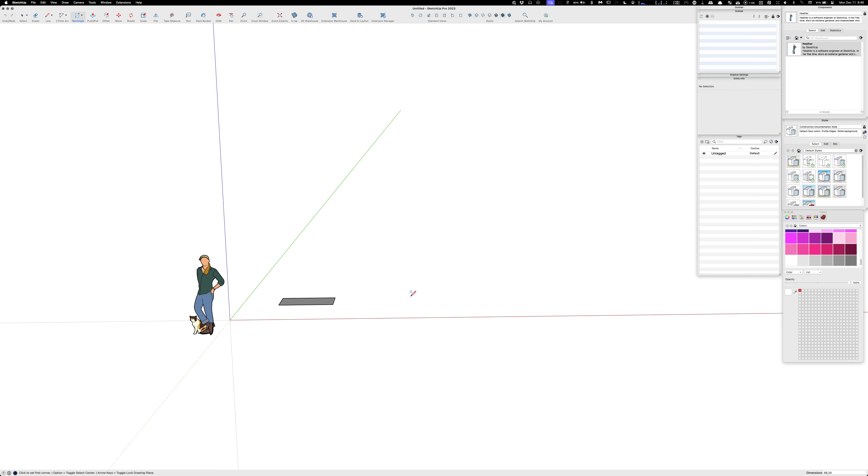I'm way over here. And then when I look over to the right, I've got a 9-foot length and a 2-foot length. So now I know 9 foot is left to right. So, but say I want it to go the other way. So then I'll go 48 by 24. And that way I now know that I've got 48 by 24.

But what happens if I did this? What if I wanted to go the other direction? So there it is again. We're like 9 foot and 2 foot. Well, I'm going to go 24 by 48. And let's spin around and look at these. These are the same. They're the exact same rectangles except in two different directions.

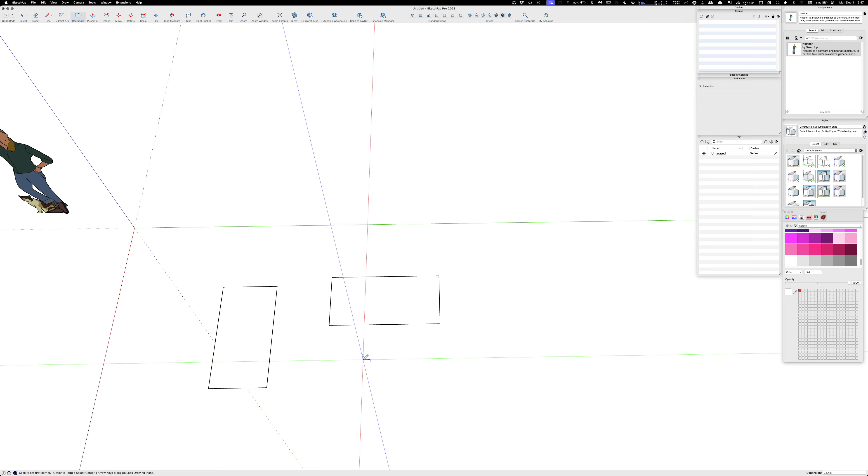So that's how to use the rectangle tool correctly, is make it extreme. Always start like this. And when you see the really long number is the first number, then you can go, well, I don't want it to go that direction. So you make the first number the shorter number of whatever set of dimensions you're going to be working with. So I'll escape out of that.

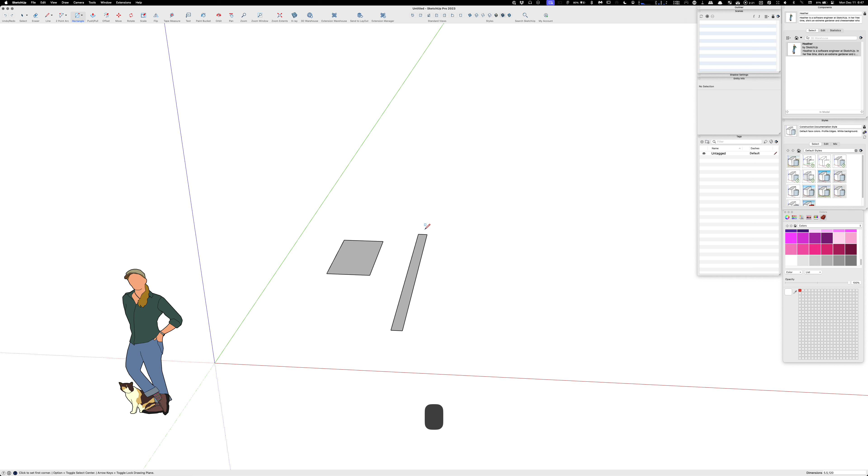The other thing is with Flip. So I'm going to really quickly see this here. I'm going this direction, and it's 3 1/8 by 10 feet. So let's go 5.5, comma 120. So there's like a 2x6, a 10-foot 2x6. It's a little shorter because they always give you a little bit on the end, so you can cut it.

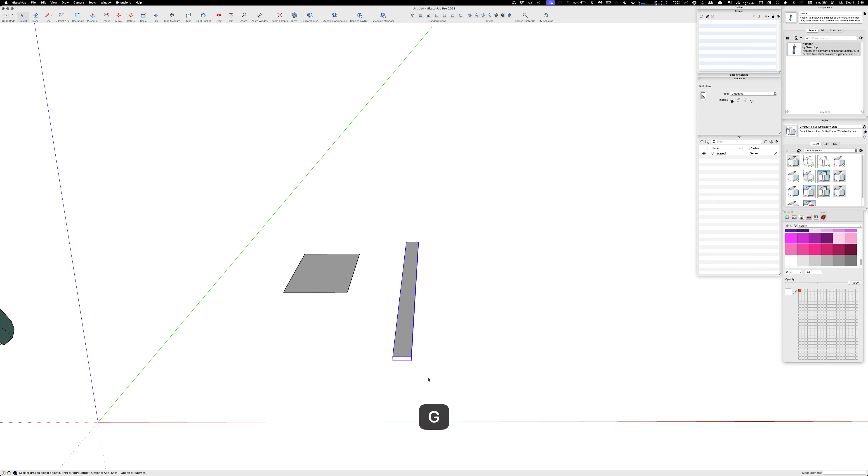And then you immediately go push-pull, which is the letter P. Come up 1.5. Here's your third tip. The sizes of things in North America, what we call it is not what it is. It's always chaos out here. They machine surface all four sides.

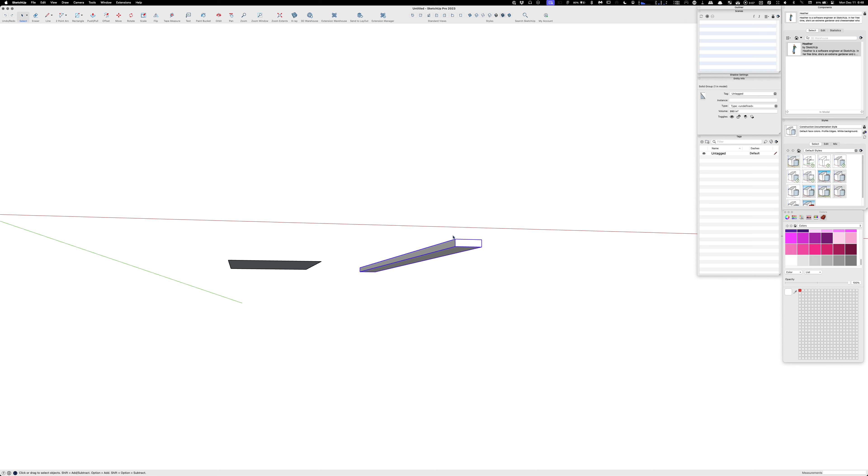So it is a 2x6 before it becomes surfaced. And then it's like planed on all four sides so that they become universally smooth. And that takes off like a 1/4 inch on each side. So starting off 2 inches tall and 6 inches wide, the finished product that you see at your big box store is 5.5 wide by 1.5 tall. So here's our plate.

You know what? Excuse me, ma'am. You need to be out of the way.

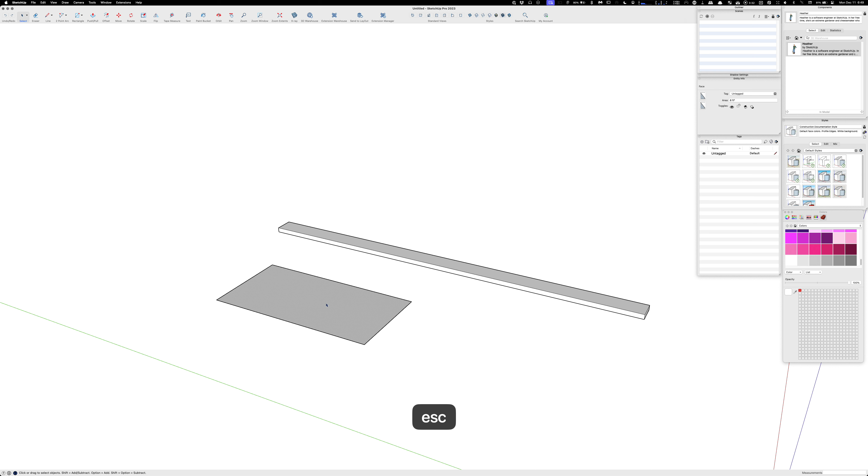And this is that rectangle that I drew, and I haven't done anything to it. I haven't grouped it. It's just sticky geometry, right? So I'm going to double, triple, whatever, quadruple click so that I get all the lines and all the face, and I'm going to G that. And we're going to put some blocking on here, but I want to use the flip command.

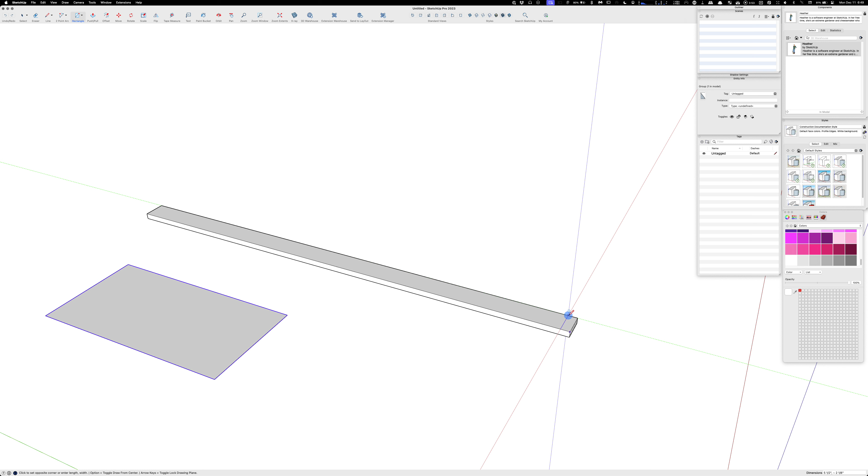So I'm going to go like this. Come on, baby. So see how it's not catching on the face? So I can push the up arrow, and then it locks it in the vertical plane, the Z plane. And now, no matter what I do, I've got it locked. And I can hover over near the edge. It says 5.5 and then tilde something. So that means it's almost 2 inches.

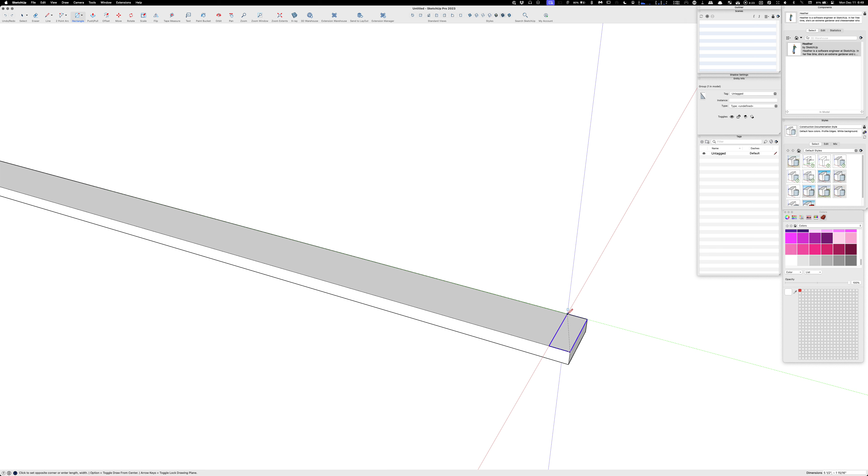So what you can do is that first 5.5 is what you want. So you just ignore that and then type comma 1.5, enter. And now the push pull, let's put a little block. Well, that's far enough. And then always 1, 2, 3, group. Or if I did component, the only advantage is if I needed to make these all taller, I'd edit one component and they would all adjust the same as the edit of the first component that I did.

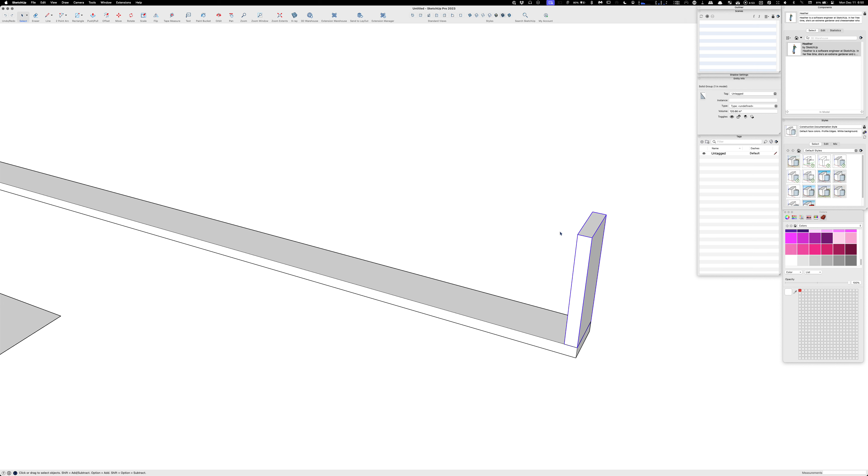While you're drawing, a good habit to get into is, okay, what are we calling these? And start building your library. Like this is a plate. So I would go like this. It's the very bottom thing. So the way I like to do it is start a numbering chain of this and then just go 2x6 plate.

And while it's there, come up here to this little flag thing, click on it. And now when you click on it right here in your group setting, it's been tagged or it's on a layer, however you want to think of it. And we'll call this a stud, so we need to create that.

So I'm going to go 005, and I like to skip numbers like 001, then 005, then 010, because it's always something where I'll be building a scene and I want it in a certain order, and I'll be able to change that number to something before or after, and I'll have space to be able to do it so I can maintain everything in a numerical alphabetical order, if that makes sense. So we're going to call this 2x6 stud.

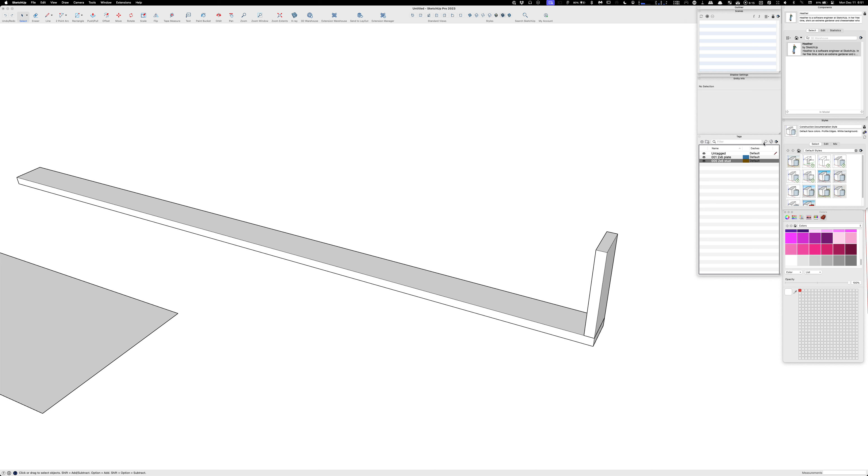Enter. Come up to the little tag, price tag thing. Click OK. And I'm hitting spacebar to bring me back to having the non-engaged tool. So the way we can do it like this, we can go up here and hit flip.

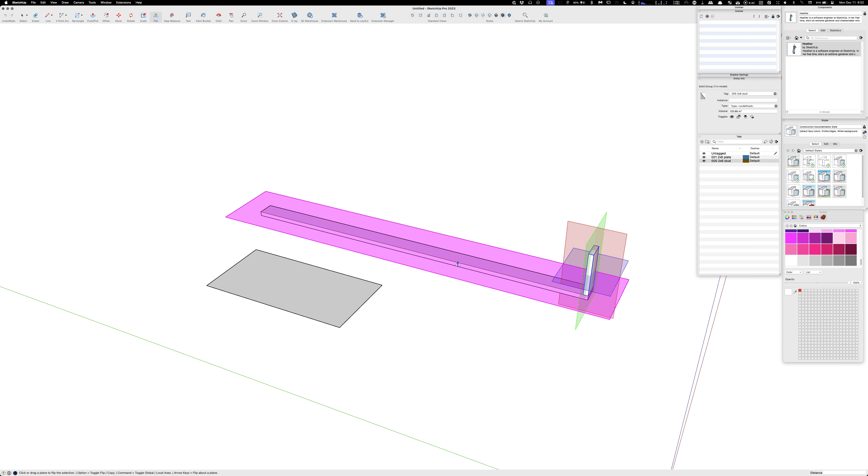And I just learned this just the other day. So I want to flip this to the other end of this board. But as you drag your cursor, there's no plane to flip. But what they showed was you could take this and left click and hold and drag along, drag along till all of a sudden there. See that? It snapped to the middle and it moved it.

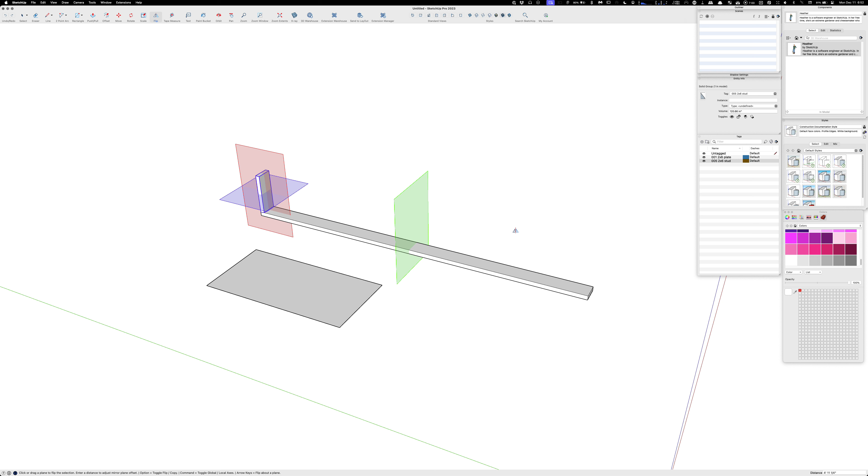But what I didn't want was I didn't want to move it. Hey, look at that. So it moved it, but I haven't released the tool yet. And I just went down and pressed Option, and it put the original one back. And now the one that's on the left is the copy. So that's the trick with all these tools. Flip has a copy option, or Alt if you're on a Windows machine.

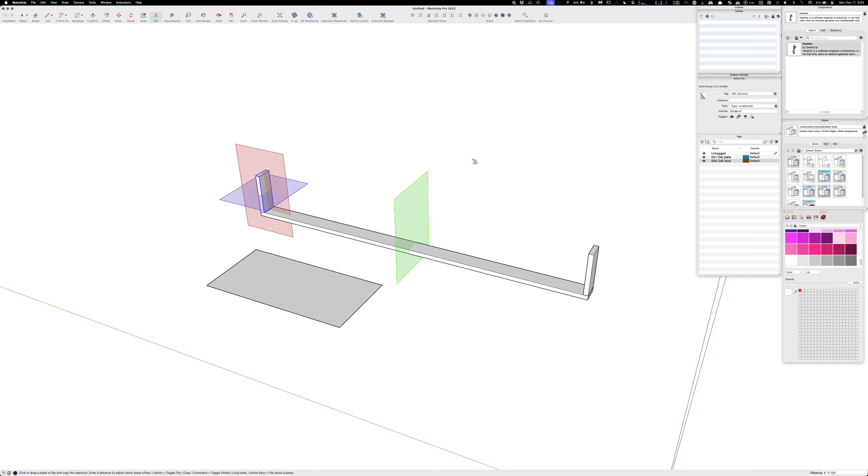Rotate has a copy option, which is kind of nice because you can have a plate at one point and then rotate a whole new plate from the original. But if you saw there what happened, I had to drag that plane until I got it where I wanted it, right? And now I'm going to hit Enter, or spacebar. I'm not really sure, but that's what we got. We got those two. But what I found, which is a lot faster.

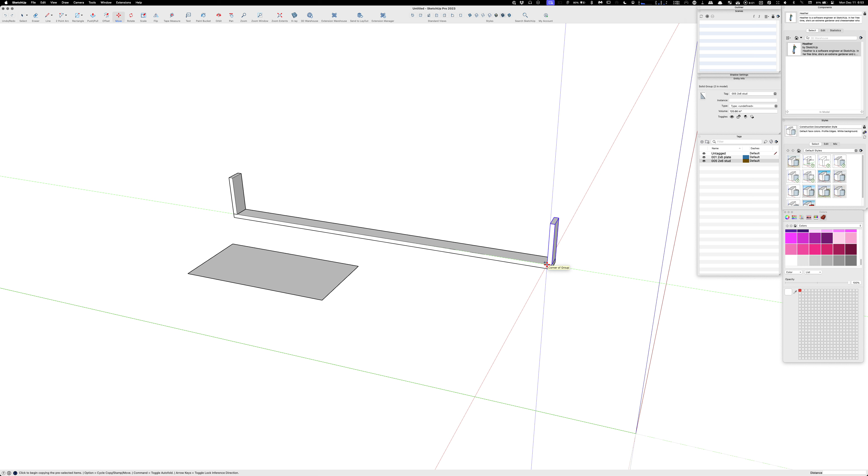So let's just make a copy of this. We'll do Move option and drag this over a little bit. And if I wanted to mirror this or flip it, I'd have to do the same process. Go here, hit flip, grab the plane, drag it over. What I found works for me is I'll just build a surface like this. And then I'll go to Q.

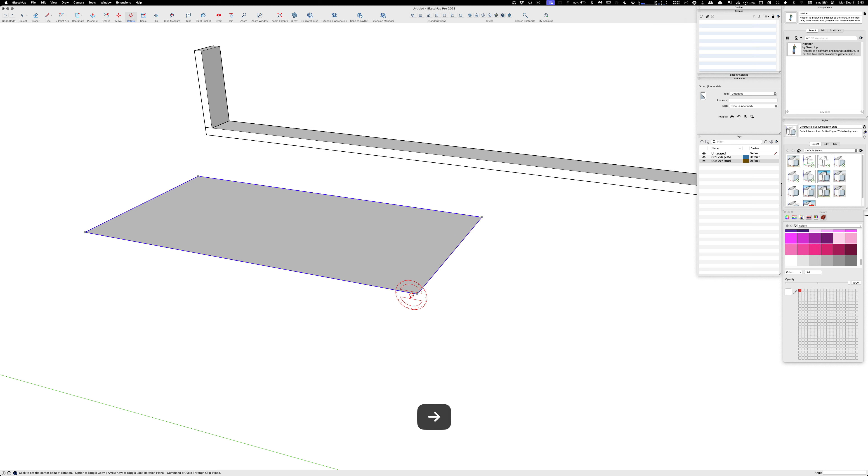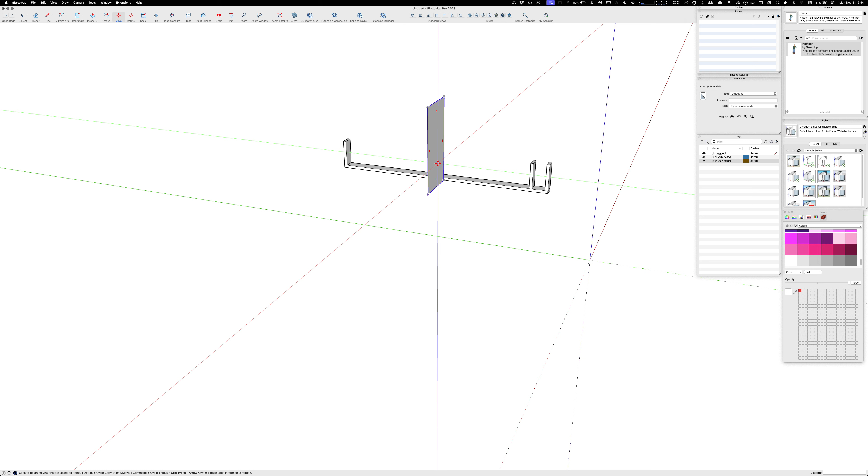And I'll play around with, it's not the green one, it's the red one. I'm dragging along its edge. Then I come up this way and it snaps to vertical. Then I grab this little corner here. And let's see, see how it snapped? Okay, so now I'm in the middle of this. Then I'll hit move and see how the red line is the direction that takes me away from the model. I will go red line, click way back here.

So now when I want to do a flip, I just go like this and I hit the flip command, and then I use this. And again, I forgot to hit the option key, but look at that. Look how fast that was. Instead of me going this and then the flip and then having to find the plane and then drag it over to where I thought the middle was, I'll just make these cutting planes, or whatever you call it.

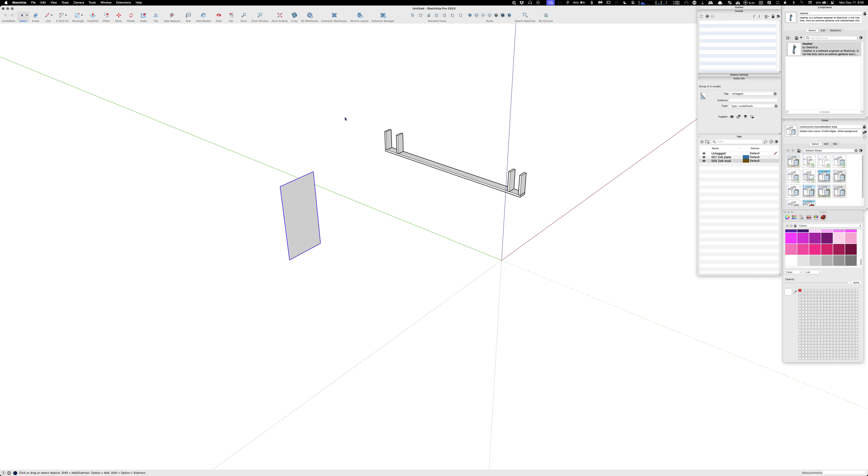Like if you're doing anything in symmetry or symmetrical, I'll place one of these here. I'll place one off the end here. I'll place one down on the Z. And we can actually label these, and I'll put a Z underscore red axis. And it's weird because I guess I'm spelling it wrong, because when you go to the tools,

let me not get ahead of myself because I'll forget and I won't come back. When you go up to these tools to set a shortcut, let's see, where are those at? Shortcut. And you want to turn off or turn on these axes. They spell it different than what I was expecting. Look at this. View axes. So that might be the right way to spell it.

I've never had to actually, in any spelling test or anything as I've grown up in all my years, didn't know that was the plural for axis. But I guess it is.

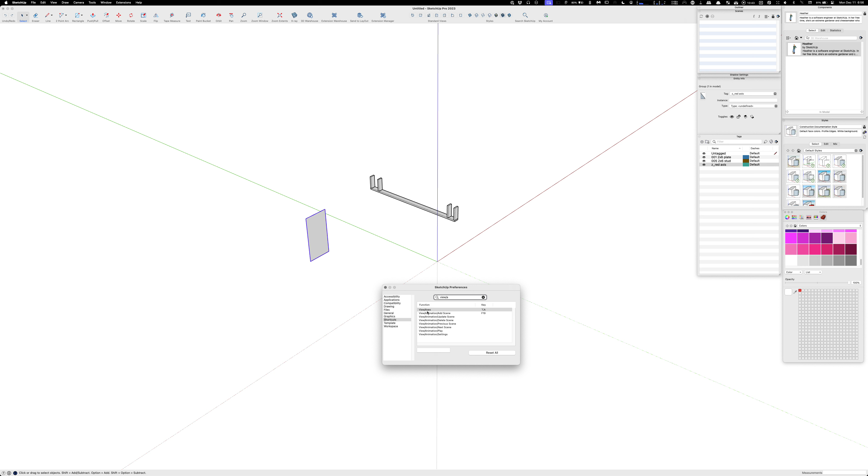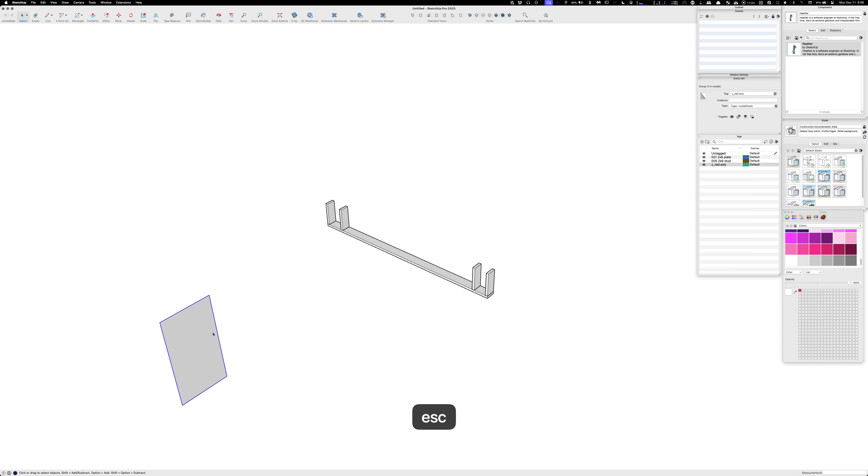It sounds right. But I made a shortcut, so what's nice is you can get that out of your way, take some screenshots, put it back. But that's all I wanted to show you was use these planes. Make your own planes. They go faster. They eliminate a couple, 3 steps. And you could set these anywhere.

Like if I wanted, I could set them horizontally, vertically, in all the 3 dimensions, I guess. But they don't have to be mid-span. They could be offset too. So it's just on how your mind comes up with a way that makes your workflow work better.